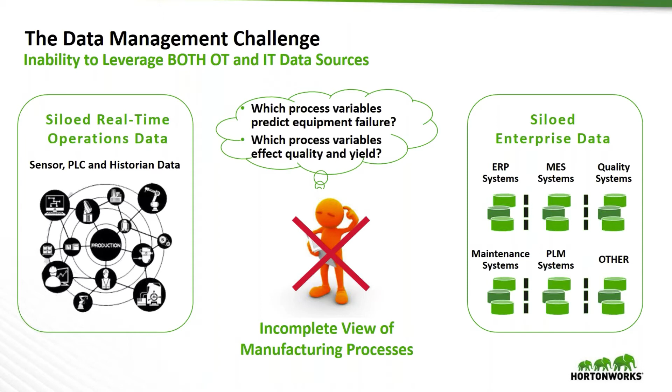So how can we kind of get around that? We're going to propose to you something we're going to call the connected manufacturing data lifecycle, which actually addresses the shortcomings of the previous slide.

Fundamentally, to do that, we're going to bring together those two types of data that we talked about—the real-time data sources you see on top, from your PLCs, your SCADAs, your historians, and the OT and IT information from your ERP systems, your MES systems, your quality systems, and all those types of systems.

The trick is, first of all, to be able to ingest all that data and put it into a manufacturing data lake that can store a wide range of data. You're no longer in a proprietary type of database that can only store a certain type of data—manufacturing data lakes can store any kind of data, and you don't have to actually define a schema first.

It's something called schema on read, where you can actually just dump the data in without predefining a schema. So you get that information, we can ingest it very easily, and then we can store it.

One of the things that's really great about a manufacturing data lake is that we can actually perform data processing workloads directly within the data lake. So you don't have to move data out—you can do all of this processing within the data lake. We'll talk about that a little bit more in a second.

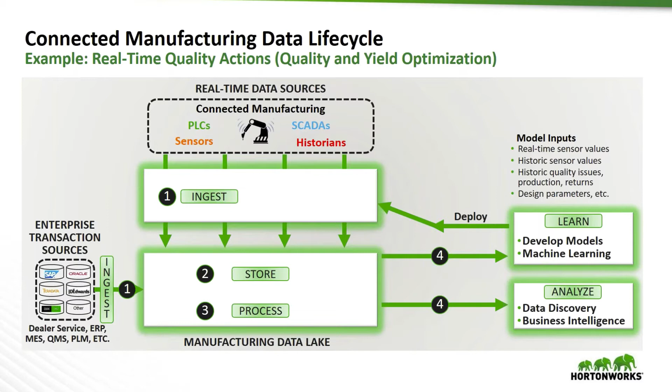You can actually pull all that information together and determine, for example, which variables actually drove successful quality or yield outcomes. Now, once you learn that model and determine those variables, you can then deploy that model out into the real-time data stream, into that ingestion stream we talked about.

You can monitor that incoming data for those combinations of variables that can cause problems, and when those things happen, we can alert you and take all kinds of actions so you can act in real time. This is what we call the connected manufacturing data lifecycle, and it allows you to become a real-time organization, taking actions in real time based on the learnings of the past. That's really what machine learning is at its core.

Okay, so that's all great. And the thing that's really neat is that in a data lake, it's not only about putting in manufacturing data. We can actually put in data of all different types. So for example, if we want to figure something out, we could pull in CRM data.

We could then start to correlate which manufacturing factors, characteristics, or timeframes actually correlated to high customer satisfaction. When we manufactured with certain characteristics, which ones actually impacted sales? Same thing from a service perspective.

So some sample use cases, just looking purely at manufacturing, that we're seeing prevalently in the field, ranging from simpler to more complex. First of all, we could pull in all that manufacturing sensor data we talked about and start to create things like process monitoring dashboards.

Important and interesting, but this gets more and more interesting as we move up in complexity. The other use case we see is what we call Process 360 — customers, once they set up that data lake, being able to get a single point of access to all critical information for analytics.

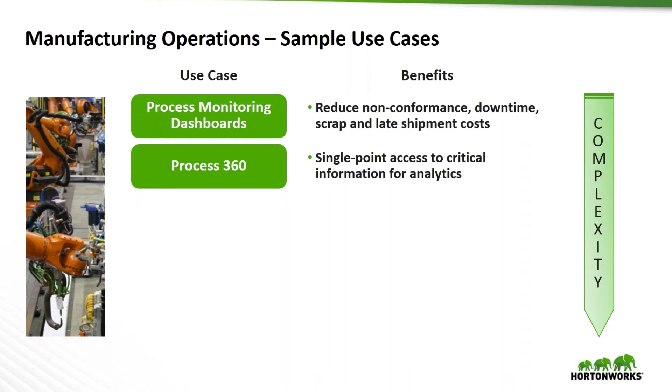This is where you can, for the first time, bring in your sensor data and correlate it to my work order data, where I could correlate it to my production rates, all very easily because all that data resides in the same place. So that's what we'll call Process 360.

But then we start getting to use cases like what we'll call quality event forensic analysis, where we start to be able to move backwards. When we talk about forensics, we say, hey, I've got a problem in the field, I've got warranty costs that are spiking — let's be able, for the affected vehicles or products, to investigate backwards and figure out what the manufacturing conditions of the day were that caused that.

And then, say in an automotive example, it's really cool that once you identify the conditions that caused problems on certain vehicles, we can find out what other vehicles exhibited the same manufacturing characteristics, and recall only those vehicles — so it's a containment action, allowing you to limit the scope of service campaigns. Quality event forensics analysis is a use case we see all the time.

We also see equipment predictive maintenance as a use case. Once you're storing all this information, you can start to figure out which factors actually predict impending equipment problems, and you can also look at it from a broader perspective in terms of which combinations of equipment events actually impacted overall plant throughput.

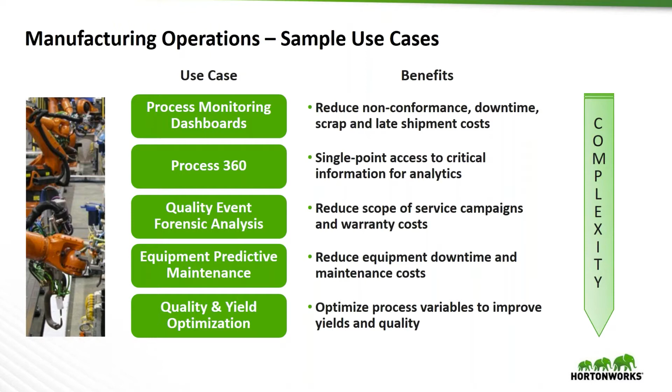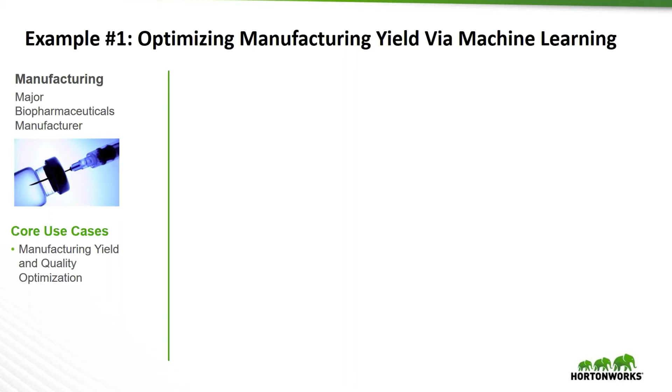Let me give you a great example to illustrate this quality and yield case. This is from a leading pharmaceutical manufacturer that we do business with. At the end of the day, the yield, meaning the amount of vaccine that I get out of a batch, is basically how much output I got from a given set of inputs. The yield is very highly correlated to profitability. So a small change in yield drives a lot of profitability, and this is why pharmaceutical manufacturers are really trying to optimize their yield.

Prior to data lakes and machine learning, this manufacturer was struggling to get a handle on why. And by the way, it wasn't that they were unique — pharmaceutical companies are always trying to improve the yield. But they were struggling to figure out which factors, of the literally thousands of manufacturing factors, such as what day of the week, what was the alkalinity of the test, what was the temperature, what was the pressure applied when making these batches — they're trying to figure out which factors actually drove yield.

Prior to a data lake, this was done manually, one variable at a time, on spreadsheets, and the human data scientist could only consider one or two batches at most. Well, enter the world of big data analytics — they set up a manufacturing data lake. They loaded all their data into Hadoop from all of their sensor data, from every batch ever made. They literally had thousands of sensors, and they were producing these batches for years.

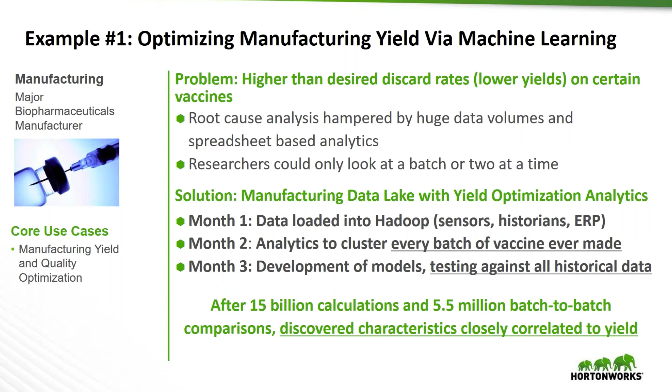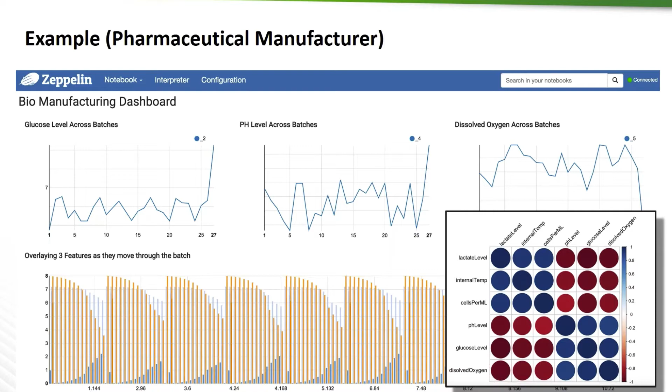They put all of that data in, and they ran machine learning algorithms to determine which factors actually correlated to yield outcomes. After 5.5 million batch-to-batch comparisons — just think about that, this is machine learning in action, because the machine is looking through each one of those variables one at a time and in combination — only then did they discover the characteristics that closely correlated to yield. This is just a cool slide that shows some of the graphical analytics that helped pinpoint and highlight which factors led to good yield outcomes.

Another example is a company we work with, Nissan. They wanted to be able to do that quality and forensic analysis I talked about earlier. They set up a manufacturing data lake. They started pulling in quality information, and they started to pull in connected vehicle data, because what they really wanted to be able to do was detect problems really quickly.

So they pulled in service repair data from their call centers and their dealerships, along with connected vehicle data, so they could detect a problem really quickly. And once they detected the problem, they wanted to drill down — and by the way, this is a journey, like lots of companies are doing. Detect that we have a problem, then load manufacturing data into the data lake, and say, okay, if we have a problem with a certain set of vehicles, let's drill down to the manufacturing conditions of the day and determine why that happened to those particular vehicles.

Then they can say, hey, if we understand the conditions that led to that, what other vehicles exhibited the same conditions that occurred on those vehicles? They could identify those vehicles that were manufactured under the same characteristics, and recall only those vehicles. So it became a containment problem — they could contain the service campaign. This is a huge issue in the automotive industry, and companies are getting real value from data lakes.

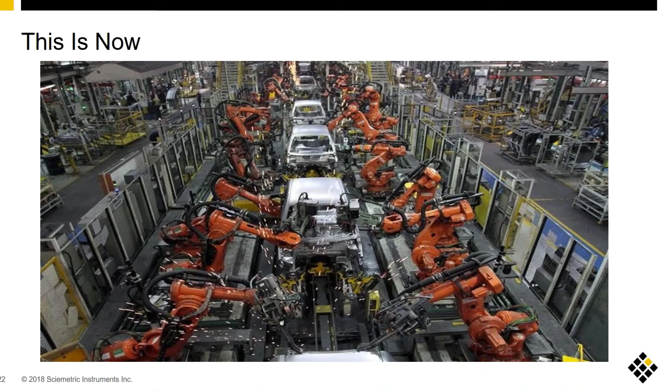There's a wealth of data here. There's data used to manage the robots, and then there's data that is measured and analyzed and retained for the quality of what is being produced, as in this case, these car bodies going through the assembly line.

And within a station, various operations are performed, okay? And here at Sciemetric, we gather all of that. So as product goes through an assembly line process, in this example an engine, we are constantly gathering data for that serialized engine, and we have a full part history, or birth history, of what is taking place.

So this is of value, especially in a data lake, because in the case of a recall, let's say for a car, if it's an engine problem, you're able to look at the VIN and know the engine, and then see some similarities of what might come in as service bay issues. The intent is, if you have this stuff in a data lake, instead of doing a recall for a number of years, potentially you can isolate it down to that day, or that week, or just that product.

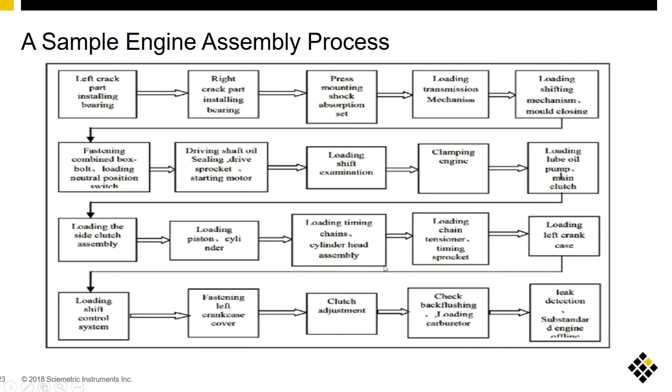So in today's modern manufacturing environment, you have autonomous robots that perform tasks with a lot of autonomy. You have simulations - if you do things and simulate them in a virtual setting, it provides a manufacturer the ability to reduce the time and cost requirements associated with the testing process.

You have cybersecurity, which is big. For those of you that aren't aware, hacks are happening everywhere, and certainly there are individuals around the world that would love to hack into certain manufacturing concerns. So it's a function of everything.

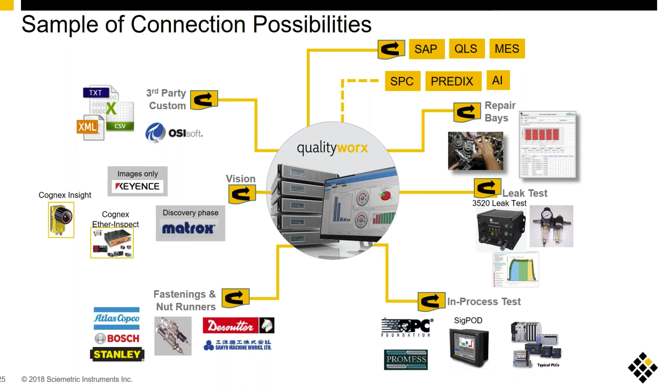And part of the bridge that has to happen is the rest of the enterprise really has to understand what portions of the data, the connectivity, are going to make sense, because not everything that a manufacturing facility produces in terms of data is really necessary, or of value, to the data lake.

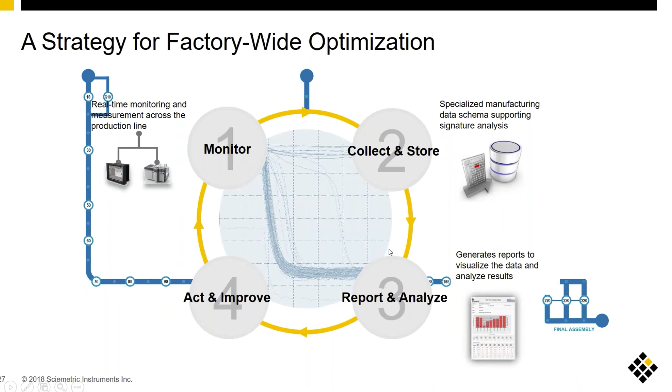So just want to go over a strategy for factory-wide optimization, again, for the benefit of those not in manufacturing. For all this to work, you've got to monitor, collect and store data, report and analyze, and act and improve upon this. My slides aren't going through. Ah, there we go. Okay.

So you want to monitor and measure. Each one of these circles would be a monitoring and measuring station or operation. You also need to collect and store data as well. You need a central repository, or ultimately gather data from other data sources and centrally have it for the plant. And you need to report and analyze.

So doing all this is important for what? Well, you want to act and improve upon things. You want to make sure you reduce your error rates, your cycle time, and improve that. You want to determine root cause if you have a warranty issue. All of these things are today what a plant floor does with their data.

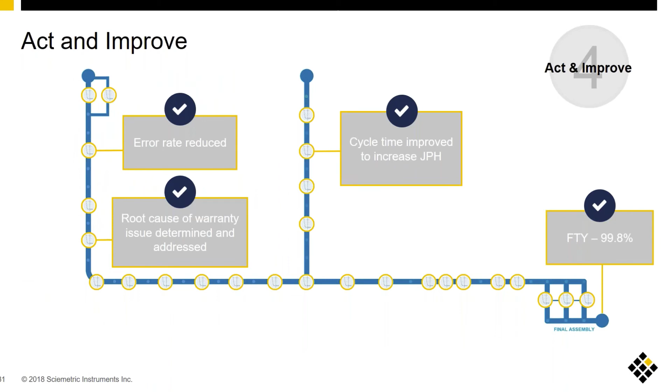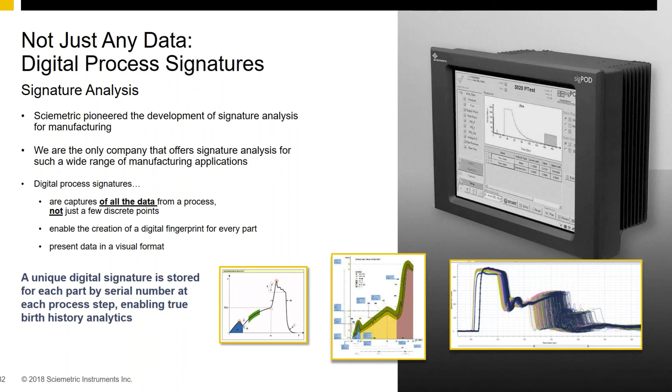So again, I like illustrations, I like pictures. What I want to talk about here is the value of what we call a process signature. At Sciemetric, we kind of pioneered this. We've been doing this for over a decade and a half, where we take all the data points of something that goes into a station, an operation, and we come up with these waves, or waveforms. It gives individuals on the plant floor the ability to look for anomalies. If you look at the right wave chart, you'll see that in blue, those are consistent things within the desired tolerances. Anything out of that is something that needs to be addressed. So in real time, someone can be at a station and identify these things rather quickly.

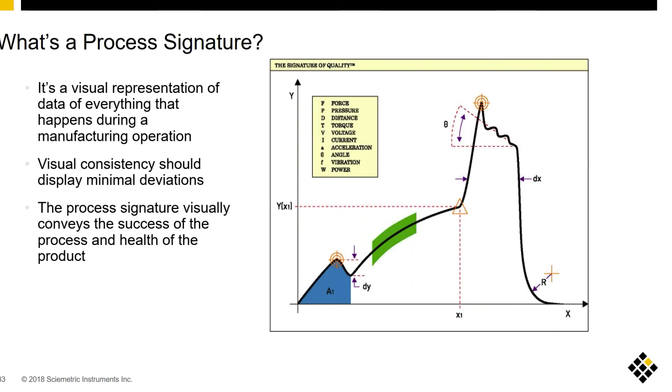So what's a process signature? Don't worry about the math here in the graph. It's just a visual representation of data of everything that happens during a manufacturing operation. Visual consistency should display minimal deviations. The process signature visually conveys the success of the process and health of a product, and it does this in real time.

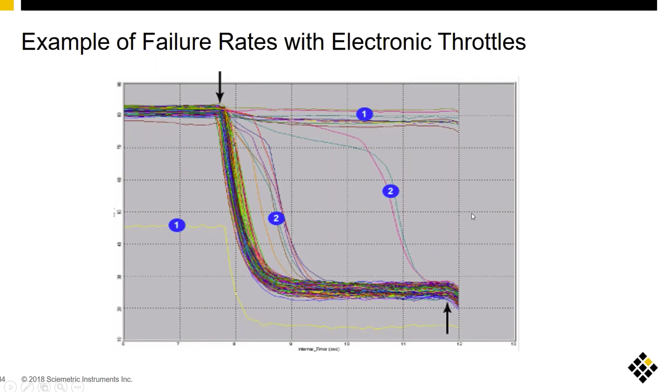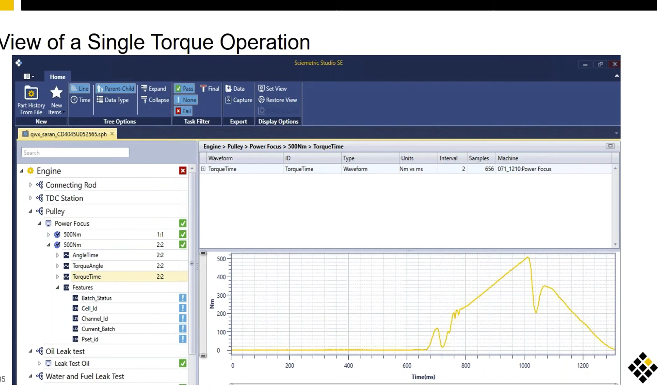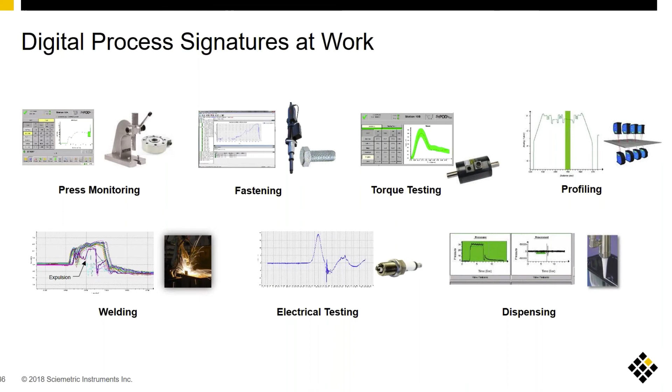As you can see here, this is just one wave. If you could overlay this many times, you would be able to see patterns of how, in this case, this single torque operation moved from product to product in that station. So for folks not in the manufacturing side, these are digital process signatures at work, and these are some of the activities that take place. Many times, some of this stuff exists in every plant. And here's some of the analysis, hundreds of applications for signature analysis.

So let's discuss vision. In addition to using process signatures, incorporating vision is necessary, especially when one needs to organize and provide manufacturing data for a corporate data lake. It's the ultimate common denominator for the enterprise to better understand manufacturing data. If you take raw scalar data in a manufacturing environment and you don't have visual confirmation of health, success, failure, or something in between, it has limited meaning in a data lake. So in a plant, it's really important, especially for key items, to have part history along with vision or illustration capabilities—undisputed evidence of a product's quality state, and immediate feedback.

So let's look at some examples here. This is just vision used to read a barcode, a typical item you will see within a plant floor. In the Sciemetric case, we have a camera that has a body and takes images. Our gateway connects and works with that camera's data, and we pass that data to our database. That's how we interact with the camera.

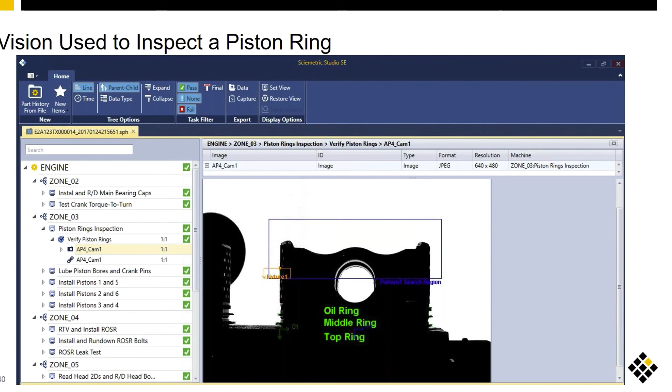Okay, so as you go down the line, we're now analyzing a piston ring, and vision is used to inspect this portion of an engine. Again, all the data is retained, and everything logically flows based on defined section, station, and operations.

With technology using cameras and software on a plant floor, you can determine the coverage, the thickness, the width, the height of this silicone. Based on prior usages or application, you know what is acceptable and what isn't. And you're storing all this data.

So let's say, for example, this happened in a station, and a forklift bumped something in the assembly line, and it may have caused a deviation to the silicone in this particular example. It may be within the acceptable KPI range that's established, but months pass down the road and a vehicle with this transmission, or a handful of vehicles that might have been affected, end up showing up in the service bay.

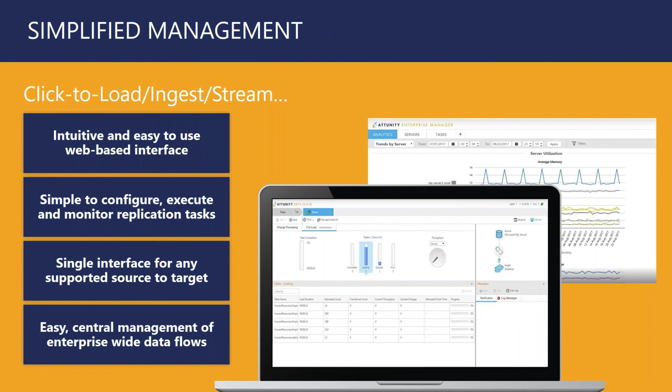When we talk about our tool set, we're bringing the data set from one of these relational databases to the data lake itself, and we're allowing it to be a streaming entity and persisted over time, making it very easy to use. So the Replicate tool is very easy to work with and manage. For the ingest, you've got over 500 different sources and targets that you're dealing with. So what you're bringing together is the ability to take all these data types and move them over time, even tools like SAP from the data model, and map it.

Later on when we discuss this, what I'm doing is taking a bunch of these DB2s, SAPs, Teradatas, all that historical data, and bringing in different kinds of sources - flat files, which I'll take today, and a SQL server - moving into a data lake. From there, that data supply chain becomes part of the story Wayne's talking about. The complexity of resolving these details and arriving at customer value propositions becomes the foundation of building what we often describe as not just customer analytics, but a 360 around the product lifecycle and industrial IoT use cases.

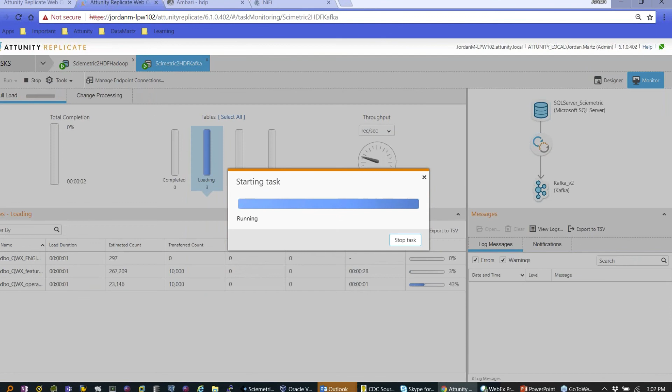Now I created a real-time use case using Kafka for that data. Inside my data sets, I've got a number of different items - I'll pull in this Sciemetric folder, and I've got different data sets. I pulled in these text files, and now I've got all these Sciemetric files right here, the part history. Those part histories can be opened using the Sciemetric Studio, where you can look at the different data sets as you're running them.

So I took all those files and used Apache NiFi, the part of the solution that drives a lot of that transition into the Hadoop platform. In Hadoop, you're replicating files and storing them. I'm going to load this up - I've put a bunch of data into the overall system and filled up my server, which means I'm doing a lot of activity with it.

But you have different sources to talk about - we're processing using Hive processing, and later we'll use Spark. NiFi is a service - I go to the quick link right here. NiFi is the same tool you hear about whose roots come from the NSA, for pulling and processing data. In the Hadoop ecosystem, it started with a lot of coding; now this gives you a nice, easy-to-use processor, which is one of the things we're going to do.

I drag this on here, and I can connect and consume from XML files. I can pull in messaging, emails, read all kinds of different things. This does very powerful ingestion for different use cases.